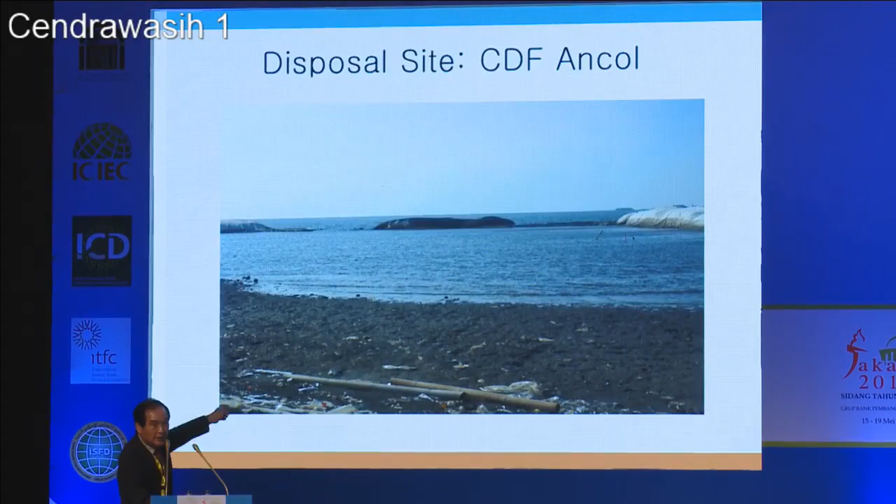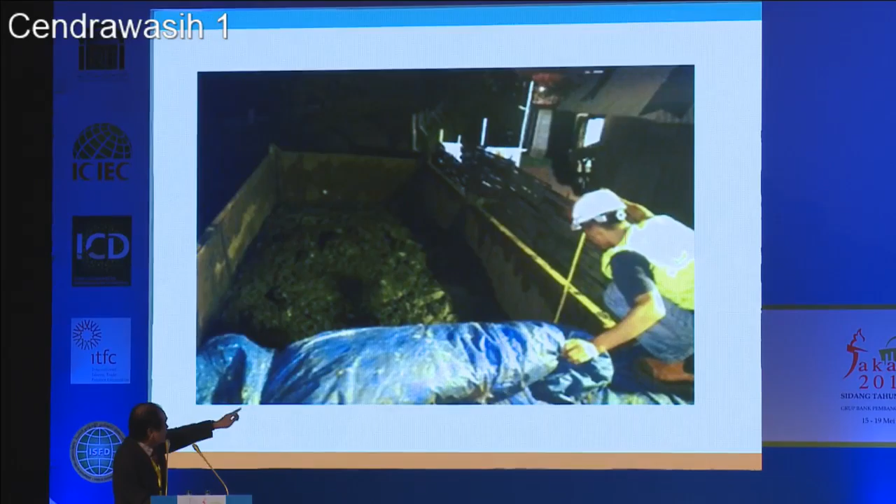An estimated 20 hectares of the sea was prepared with sea dikes on both sides, and we dumped and disposed all the dredge material at that site. The volume is checked as all the dredge material is moved with dump trucks, and the volume is measured at the site.

For other work, usually for rehabilitation or protection of the embankment, we are using concrete sheet piles. This is the concrete sheet pile. The length we use is around 10 meters to 18 meters.

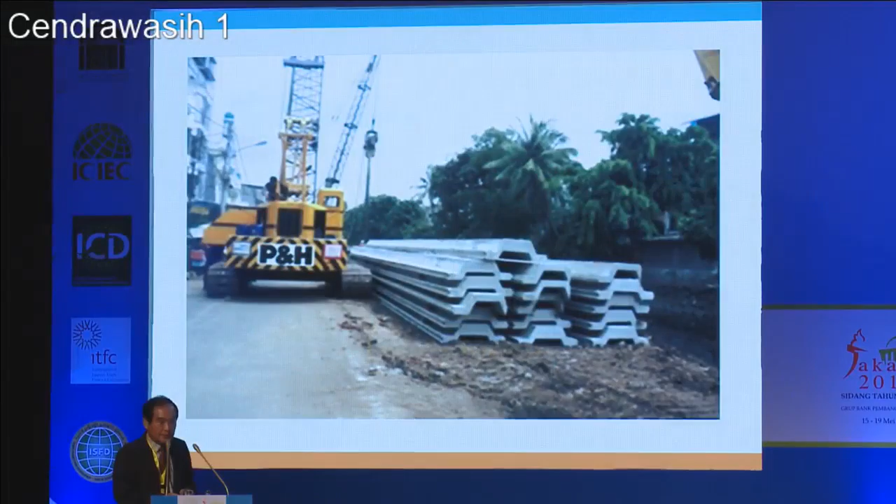This is showing the driving of the concrete sheet pile with a vibrator, vibro hammer, or diesel hammers. This shows the driven piles.

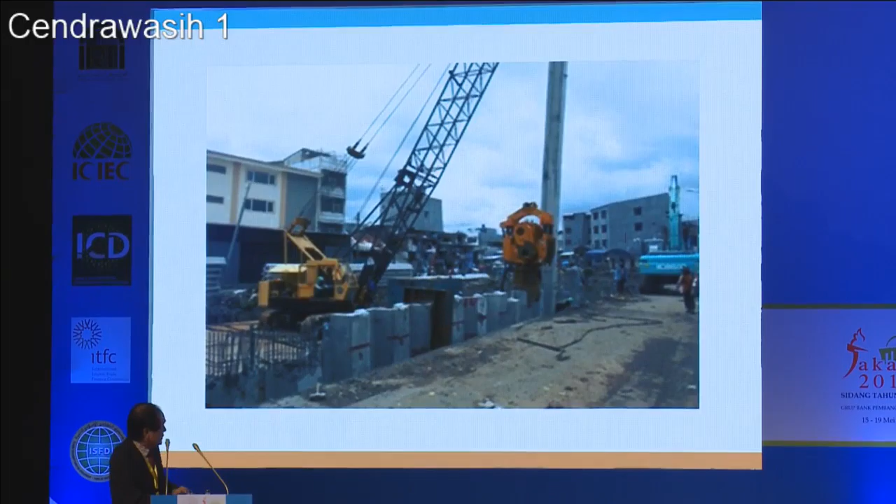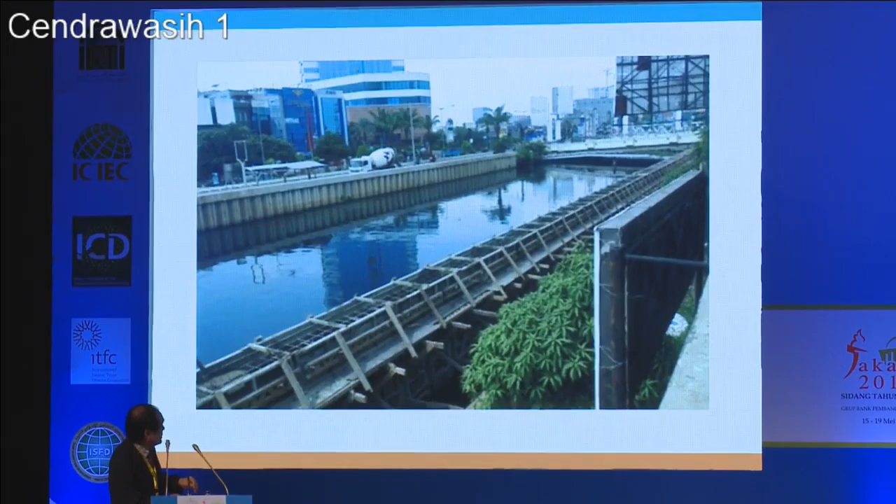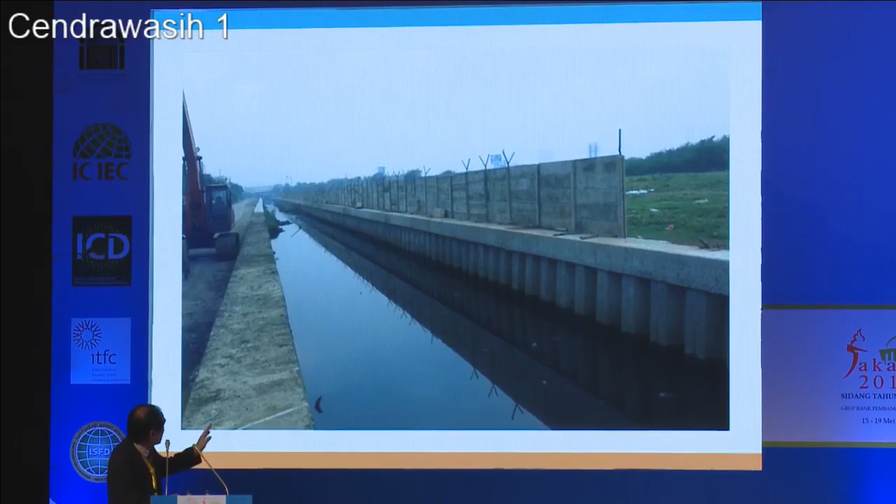After the pile driving, we have the capping beam here, like this. This is showing how the sheet pile driving work looks after the capping beam, the final work here.

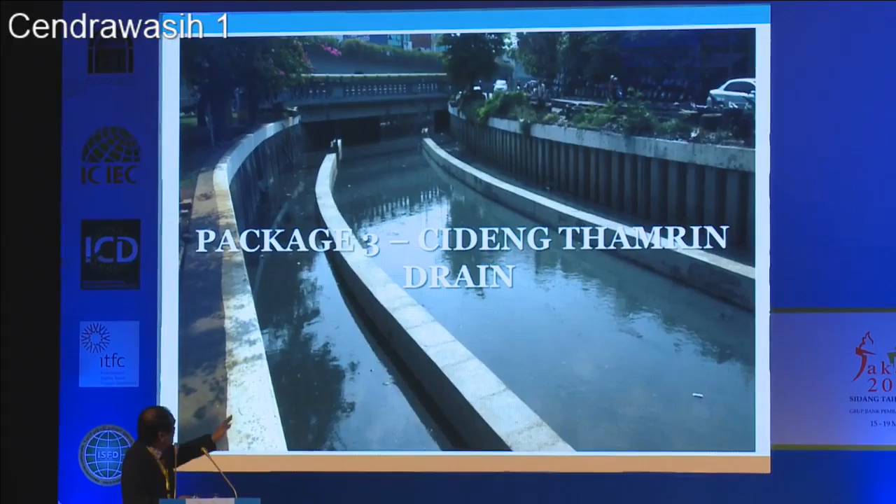In some places we have a double sheet pile, with an outside sheet pile to protect against collapse. We drive the outside sheet pile, and another sheet pile inside the channel.

Not only the channel, but also a small retention reservoir, which we call Waduk Melati, we dredge out as well.

Okay, time is running. Let me summarize.

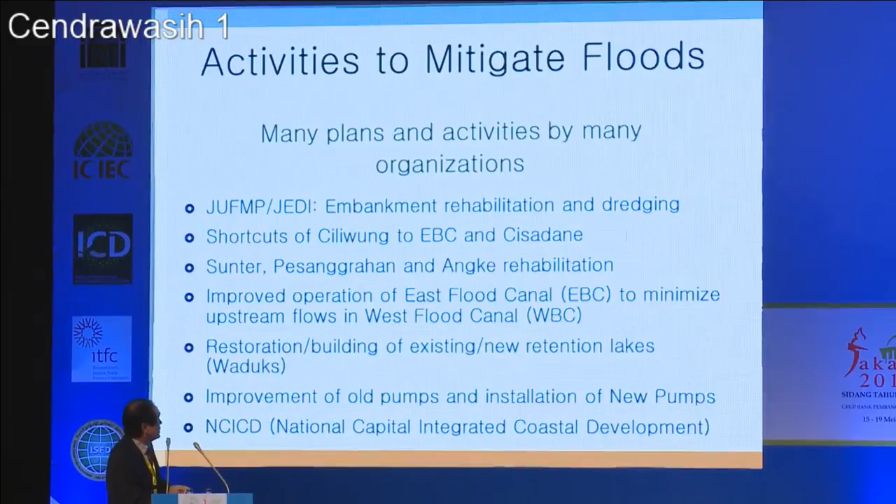Now I want to tell you that the government and many organizations are now making plans and activities to reduce flooding in Jakarta. Among these, our project is one of many projects, and I want to tell you about it now.

The NCICD project, which is the National Capital Integrated Coastal Development Project, will be supported by the Netherlands and the Korean government.

In our expectation, the flood problems were very serious, but now with these flood mitigation activities, the situation is improving year by year, and it will be solved.

Thank you very much for your attention to this project. Thank you.

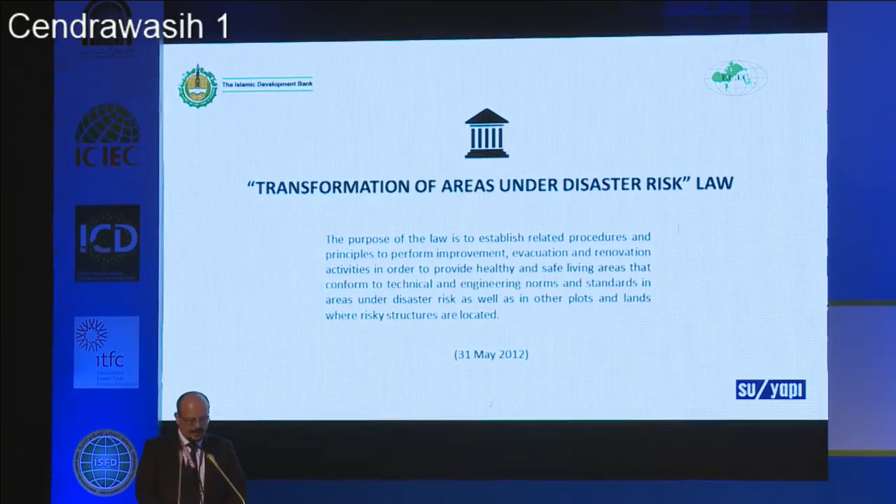The law defines itself like that: the purpose of the law is to establish related procedures and principles to perform improvement, evacuation, and renovation activities in order to provide healthy and safe living areas that conform to technical and engineering norms and standards in areas under disaster risk, as well as in other plots and lands where risky structures are located.

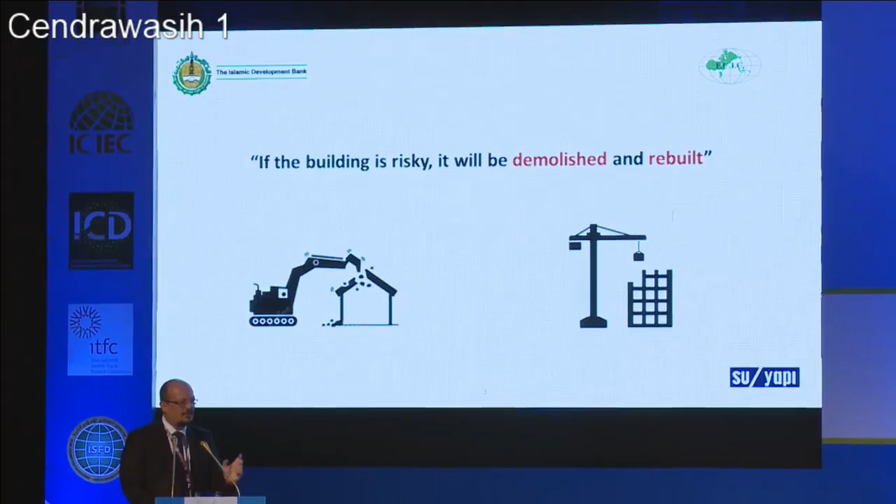If we summarize this law in one sentence, it simply says: if the building is risky, it will be demolished and rebuilt. I believe these terms, 'demolished and rebuilt,' have certainly drawn your attention.

Well then, why was such a law needed?

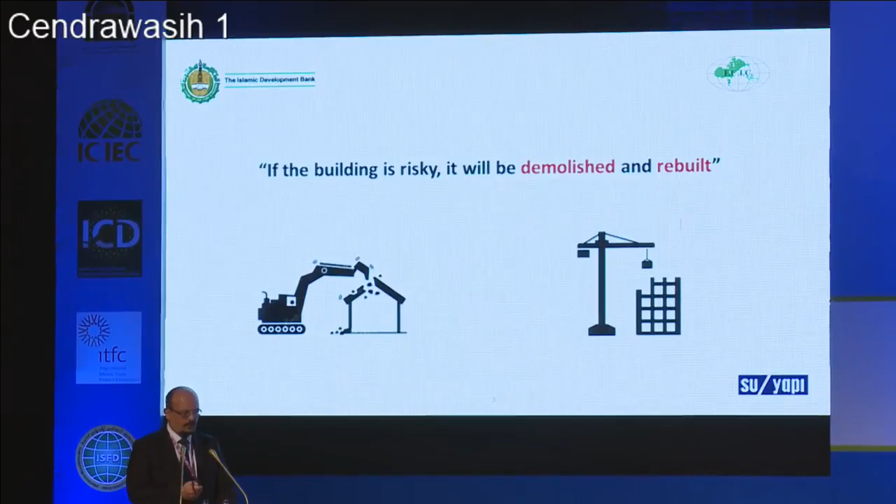The answer is disaster risk, of course. Unfortunately, when it comes to disasters, Turkey has had rather bad experiences.

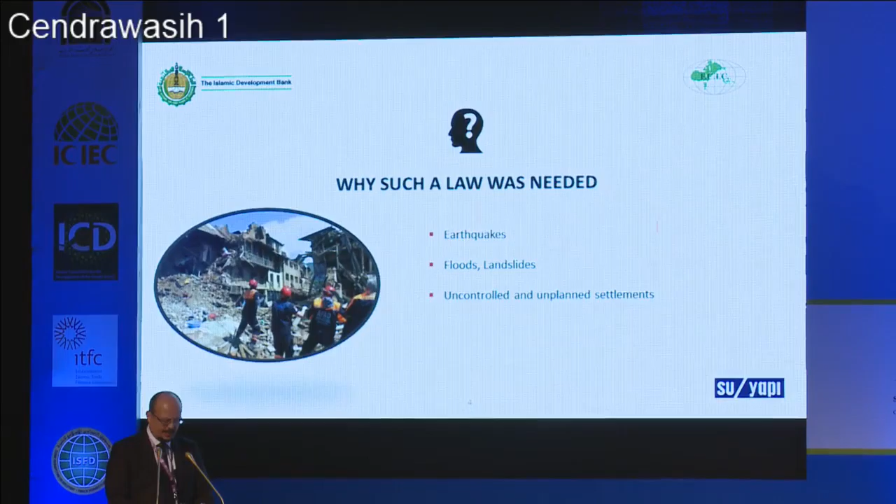The first risk is earthquake risk. Turkey is one of the most seismically active regions in the world. 70% of Turkey's population live in high earthquake risk areas. 66% of the total area of Turkey is located on active fault zones, and 64% of losses and 75% of damaged buildings in all disasters in the last century have been caused by earthquakes.

The second risk is flood risk. Losses from floods account for 15% of total disaster losses. Annual average loss is more than 100 million US dollars.

The third one is landslide risk. 25% of land is subject to landslides. 11% of population lives on these lands. In disasters, 16% of total disaster losses is caused by landslides.

Estimated economic losses due to disasters in the last decade amount to more than 1 billion US dollars annually for Turkey. Turkey is ranked sixth in the world in annual frequency of earthquakes with magnitude above 5.5 on the Richter scale, and Turkey is in third place in the world regarding loss of life due to disasters, with approximately 950 persons annually.

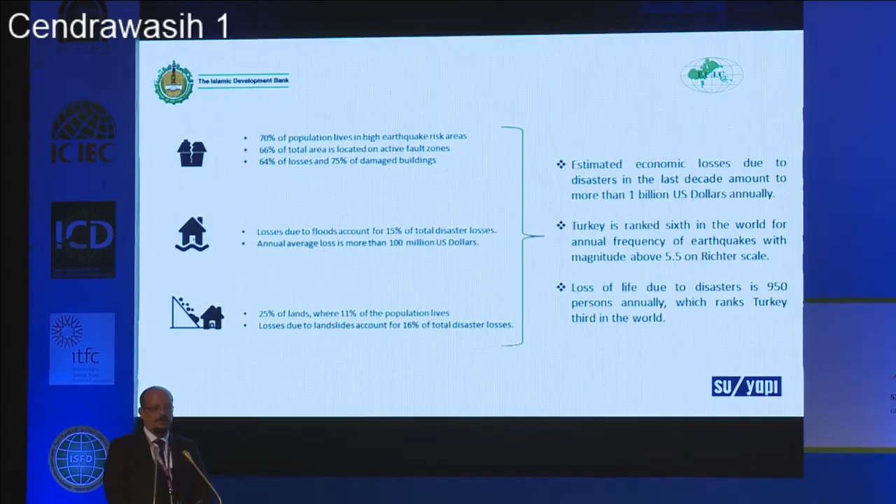If we look at Istanbul as an example, we are expecting a 7.7 magnitude earthquake in the next 30 years. According to scenario studies in 2012, such an earthquake will cause 60,000 buildings to collapse and 70,000 persons to lose their lives. Total financial loss will exceed 40 billion US dollars.

So we have to do something. That's why we need such a law.

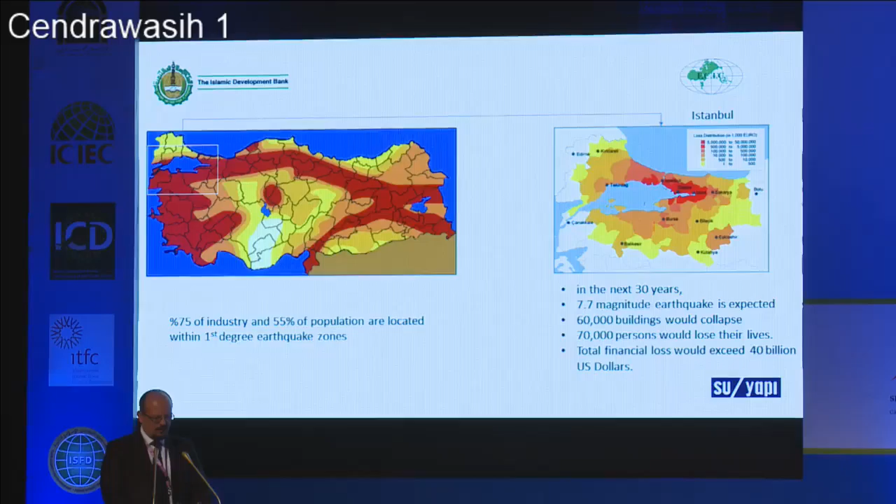Another question is, what is a risky structure? Again, the law defines a risky structure as any structure, inside or outside risky areas, which has completed its economic life or has a risk of collapsing or suffering damage according to scientific and technical data.

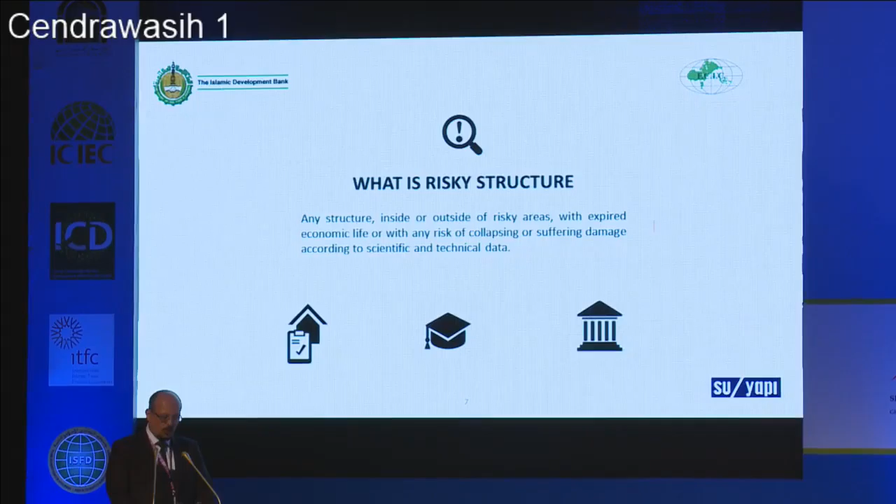Scientific and technical data is very important here. So who will decide it is risky or not? The law foresees that such scientific and technical inspections and evaluations are to be performed by the ministry itself, municipalities, and licensed institutions.

If we look at implementation of the law, there are several phases. The first phase is request for the inspection. Any homeowner can request inspections. For example, if there is a building with maybe 20 house units, it doesn't matter, only one homeowner needs to request it, and this inspection must be done with licensed institutions.

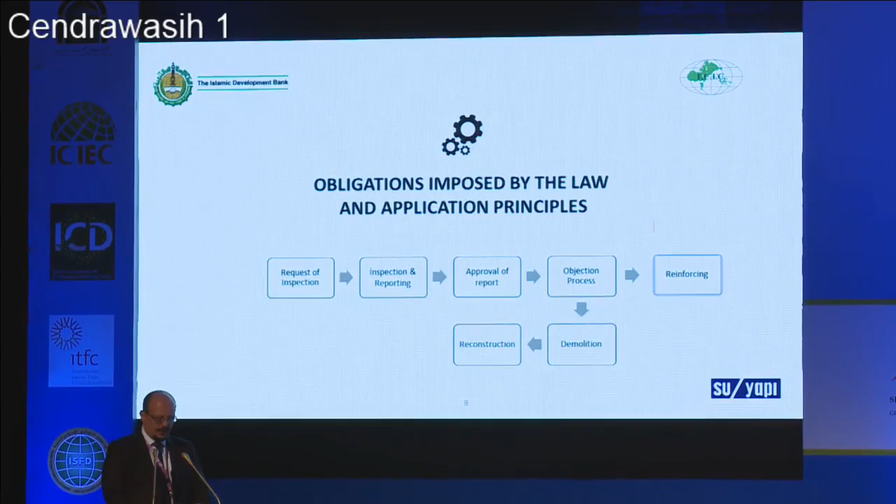The second stage is the inspection stage. The licensed institutions take samples from the building and prepare a report pursuant to the relevant legislation, and submit that report to the relevant urban transformation directorates. The third stage is approval of the report.

The directorate reviews those reports, and if the report says it is risky and it is acceptable for the directorate, they send a relevant notification to the land register office. This is important because the land register office knows that this building is risky.

Then the land register offices notify all homeowners, and give them a certain time for demolition or objection. Because sometimes some homeowners don't want demolition and they have objections, so there is an objection stage.

If there is an objection, a committee is set up with 7 persons in each case, 4 from universities and 3 from the ministry, and they give the last decision, the final decision. In some cases, the structure is risky, but there's no need to demolish it.

Maybe reinforcing is enough. In this stage, instead of demolishing, reinforcing procedures start. But if demolition is decided, it will be followed by municipalities, and they really follow through. They stop all services, electricity, water, gas, and within a certain time, that building must be demolished.